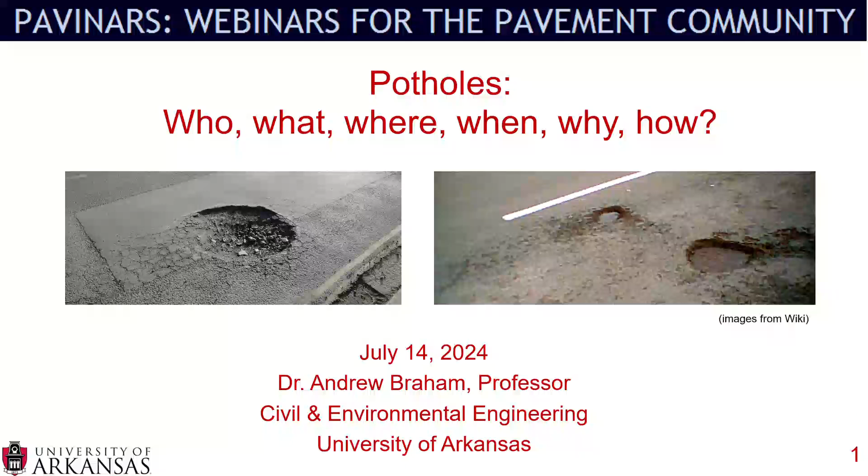My name is Andrew Braham, and today we're going to talk about potholes - the who, what, where, when, why, and most interestingly, how of potholes. We'll start with the background, covering who and what a pothole is and why we care. Then we'll talk about pothole formation, the where and when potholes form, followed by how to avoid and fix potholes. Finally, I'll show additional resources from both state and national level work.

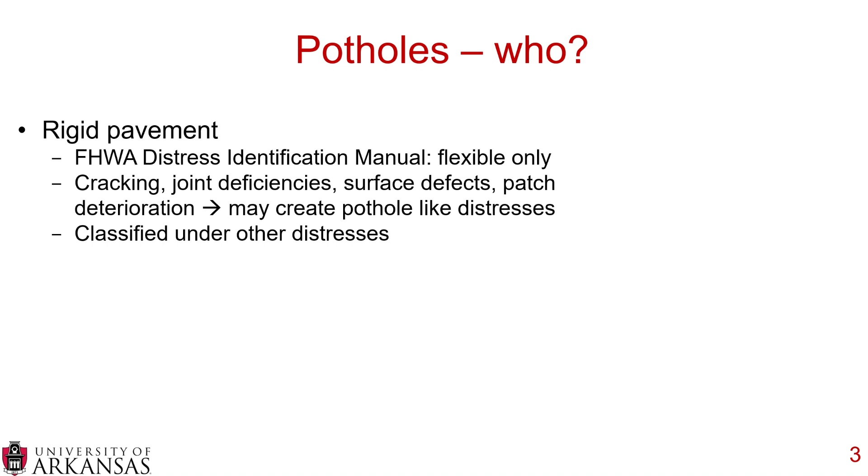So potholes, who are they? If you look at rigid pavements, the FHWA Distress Identification Manual only defines potholes as a flexible pavement distress. Now, when looking at rigid pavements, cracking, joint deficiencies, surface defects, and patch deterioration may all create pothole-like distresses, but those are discrete distresses not under the pothole umbrella. Therefore, potholes only apply to flexible pavements per the FHWA manual, defined as bowl-shaped holes of various sizes with a minimum plan dimension or diameter of just under 6 inches, so 5.9 inches.

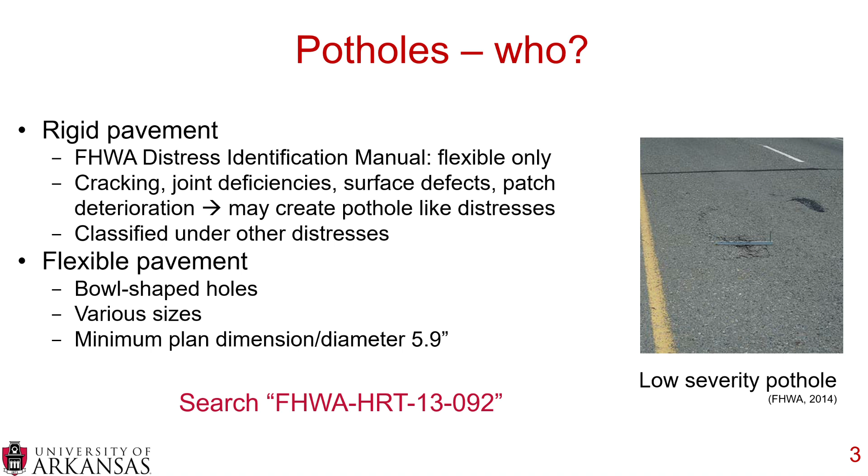As you can see on the right, we have a picture of a low-severity pothole. You can find out about all of this if you search online for FHWA-HRT-13-092, which is the FHWA Distress Identification Manual.

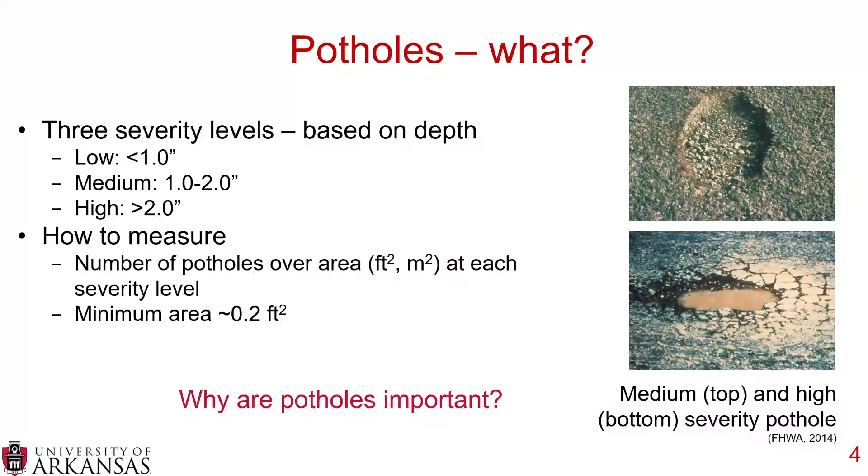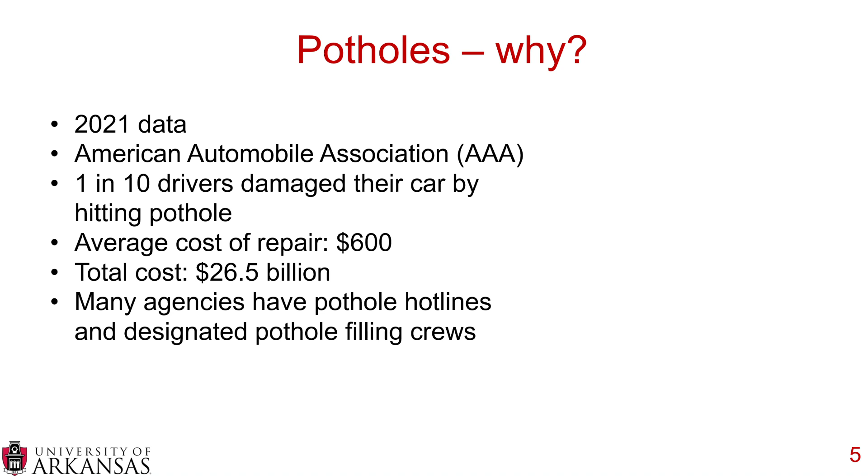Now we look at why potholes are important. If we look at the American Automobile Association, or AAA, and data they collected in 2021, approximately 1 in 10 drivers have damaged their car by hitting a pothole. So 10% of drivers in the United States have damaged their car hitting a pothole, and the average cost of repair is $600. If you look at all vehicles that hit a pothole in 2021, the estimated total cost of pothole damage just to vehicles is $26.5 billion. That's a very large number, showing why potholes are a very important issue and why many agencies have developed pothole hotlines and designated pothole filling crews.

Now, there are pros and cons to having these designated crews. Some people say it's too reactive and you should go for a more systematic approach. But at the end of the day, a lot of cities have found success with designated crews who go out and simply fill potholes every day based on where people report them in their municipality. So what can we do as engineers? We can do proper design and proper maintenance of our roads, and we'll talk about that in the 3rd section of this Pavinar.

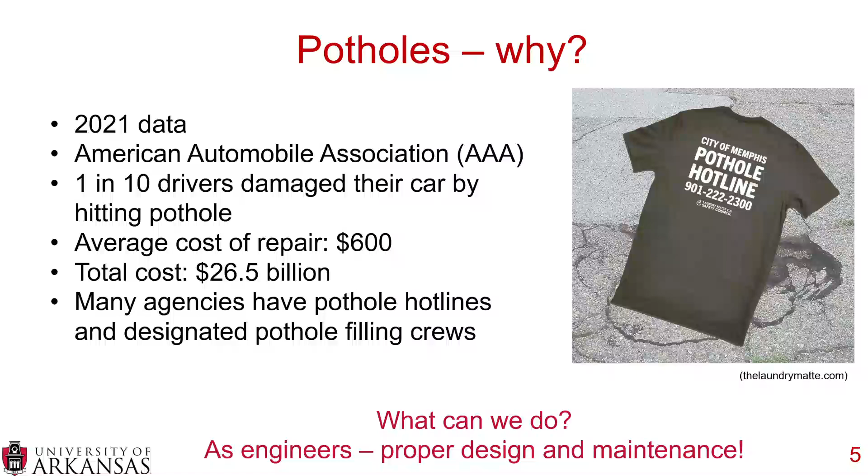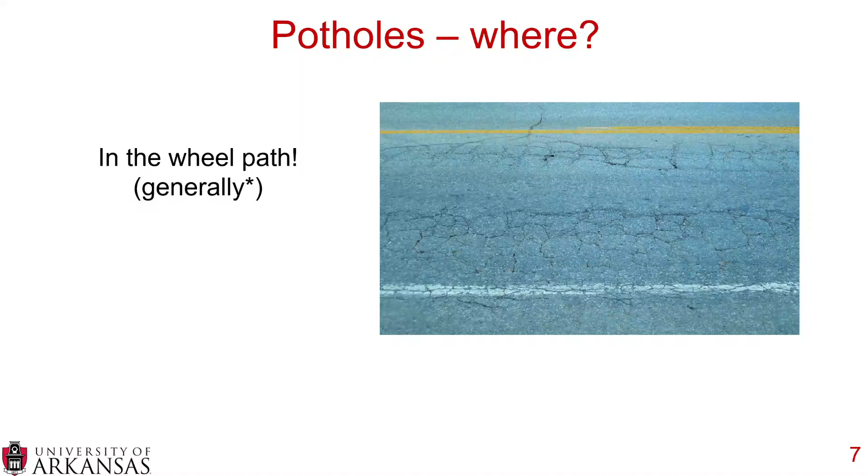Next we're going to go to pothole formation - how do potholes actually start forming? The where of potholes: generally, it's in the wheel path. You need some sort of loads in order to have a pothole start forming. You can see a pretty highly distressed pavement here, and I would assume potholes will start forming shortly on this roadway. Now, there is one big exception - poor longitudinal or transverse joints. If you have poor longitudinal or transverse joints, it may start deteriorating without even any wheel applications, and you could start getting potholes. There are other mechanisms, but in general, from a design, maintenance, and planning standpoint, we need to worry about the wheel path, and there are multiple mechanisms behind pothole formation.

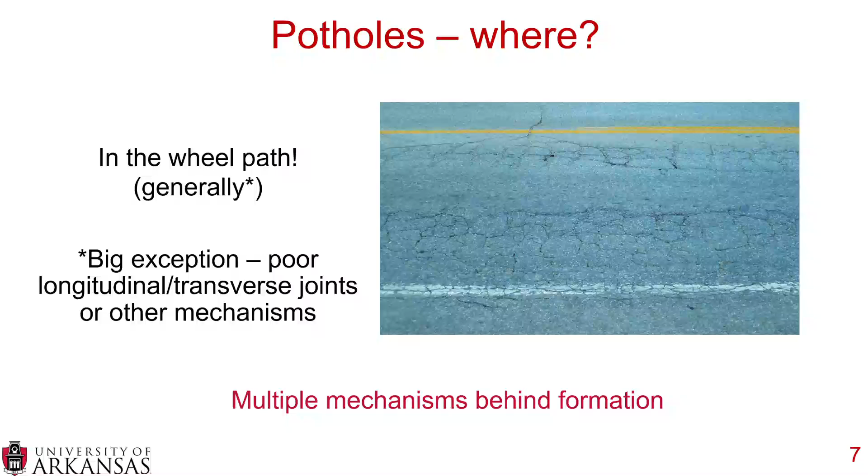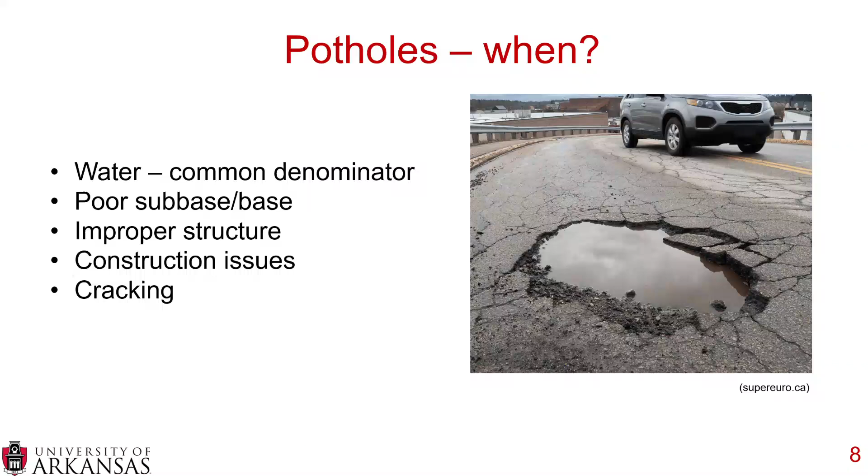So when do potholes form? Water is the common denominator. You'll notice that a lot of the pictures in this presentation - I just went online and got a whole bunch of different ones - the vast majority of them have water in them. You could also have a poor subbase or base course, improper structure and improper pavement structural design, and construction issues. That goes back to the longitudinal and transverse joints and some other issues we'll talk about. Finally, all of these types of things can lead to cracking.

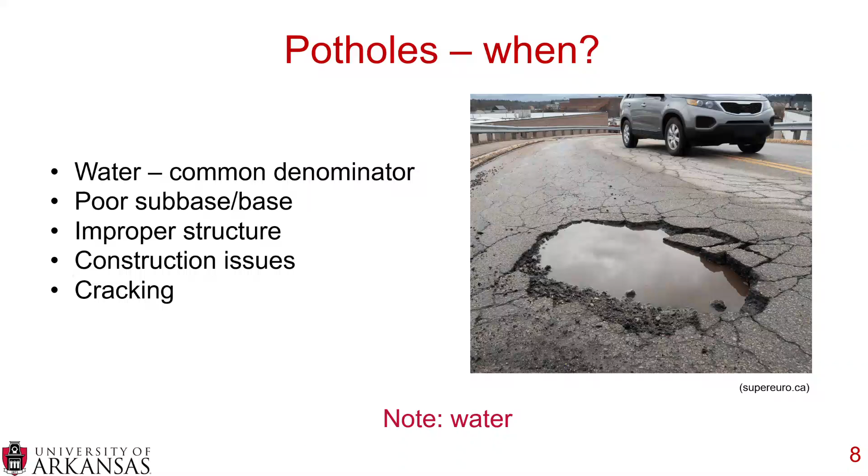And at the end of the day, you have cracking and those cracks turn into potholes. Now I do want to note that water is listed first here. Water is a common denominator, and let's keep water in the back of our mind because we're going to talk about that quite a bit more later in this Pavinar. But let's go into a little more detail about the last four.

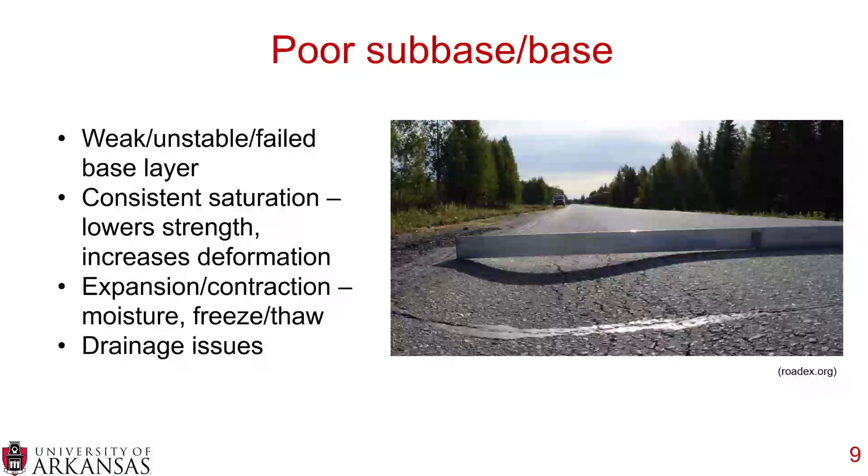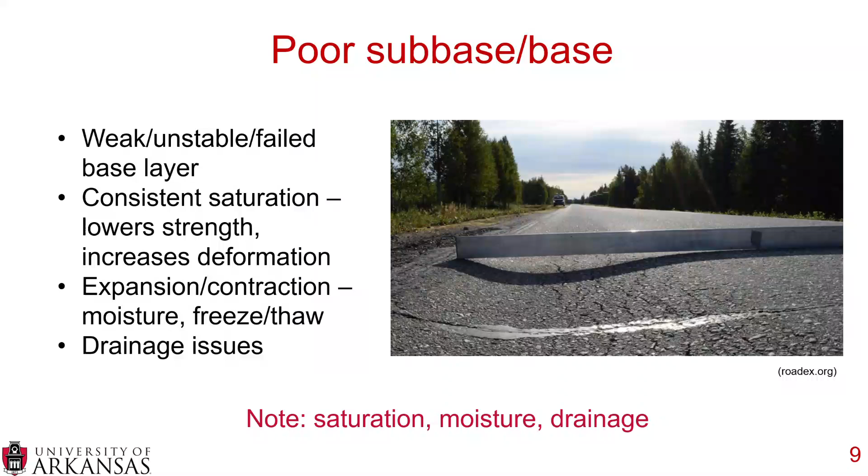So a poor subbase or base course. This can be either a weak base layer, an unstable base layer, or a failed base layer. This can be because of the materials or because of constant saturation. If you have constant saturation, you lower the strength of your base or subbase layer, and that can potentially increase deformation. You can have expansion and contraction of your weak, unstable, or failed base layer, and this comes from moisture and also moisture within freeze-thaw cycles. A lot of this stems from the fact that the subbase or base has poor drainage issues. I want you to notice that a lot of the things under the poor subbase and base come from saturation, moisture, and drainage. This all revolves around water.

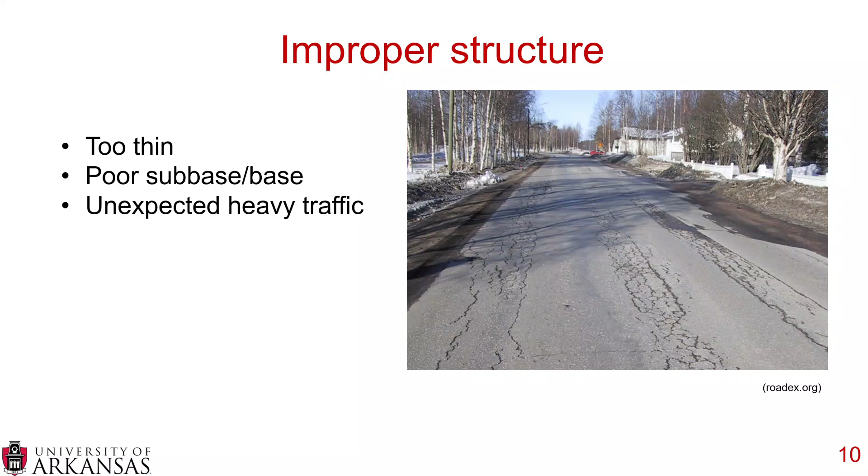You can have an improper structure, so your structure can simply be too thin. Again, you can have a poor subbase or base. If you design for a certain quality subbase or base and you're not achieving that, then your structure is compromised. You can have unexpected heavy traffic, so during pavement design, the type of traffic that goes on there is very important. Often you'll see potholes form rapidly on roads that lead to a construction site, a new neighborhood being built, or a new building being built.

That's because of those very heavy truckloads driving over a road that simply was not designed for it. You could have compromised materials, so at the plant it's either heated too much, or you could have some moisture in there which will lead to stripping, and then you can have delamination. Delamination is where you try and tack coat or glue your pavement layers together. Flexible pavements are built in layers. Those layers have to be glued together. If they are not glued together, you'll have issues. And that causes delamination, which is either an improperly placed tack coat or a failed tack coat.

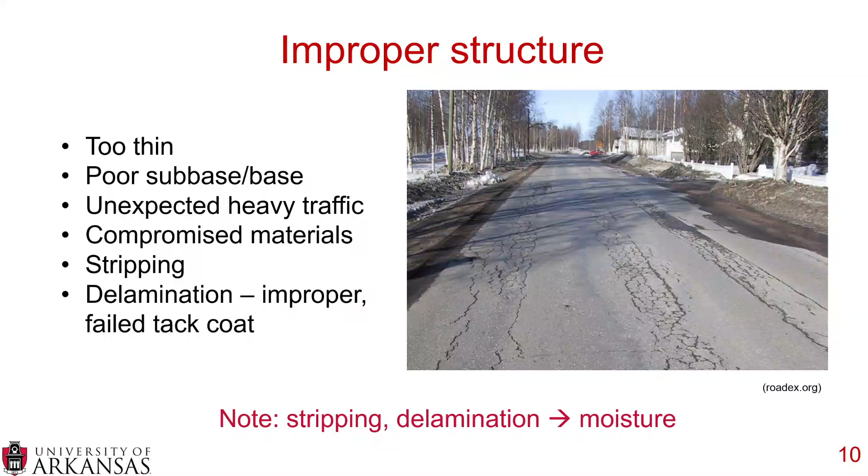Again, I just ask you to take a look at the concepts of stripping and delamination. These can both be caused by moisture, so moisture is a very important issue. Now you can have the best materials in the world, you can have the best design in the world, but if you have poor construction, you're going to have issues. There's a couple things you want to look out for. One is asphalt mixture segregation, and this can be either physical or thermal.

Poor longitudinal joints can cause potholes. If you want to see some great potholes, come on over to the city of Fayetteville, Arkansas, and drive down Maple Street. There's a right-hand turn lane that turns right into Arkansas Avenue, and that is just a haven for potholes. They fix it all the time, put overlays on, fill the potholes, and those potholes just keep coming back. So got a great example here in Fayetteville, Arkansas.

Then also, if you have deleterious materials in your mix, that can cause weak spots. Those weak spots fail and potholes can start forming there. So obviously, you always need to be very careful with your construction and have proper construction practices.

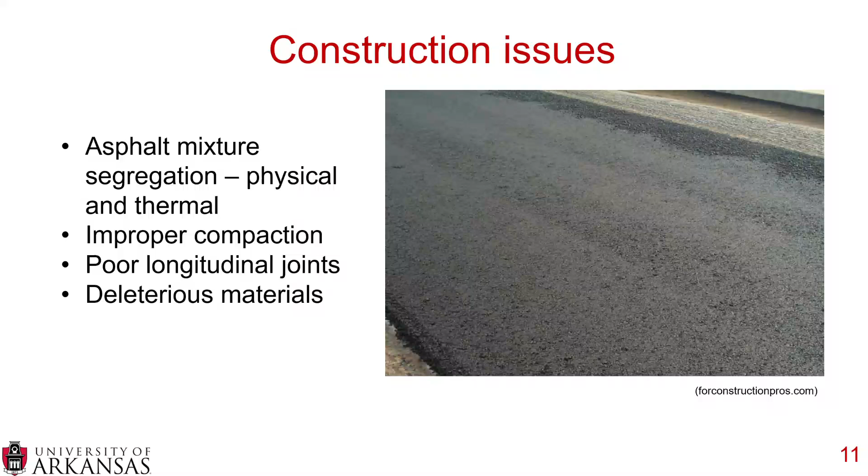Now, all these things at the end of the day usually lead to some sort of cracking, and you need cracking in order to get potholes. So the accelerators of cracking are both age and oxidation. It can also be all of the issues that we talked about before, the poor subbase, the moisture, the construction, all those types of things.

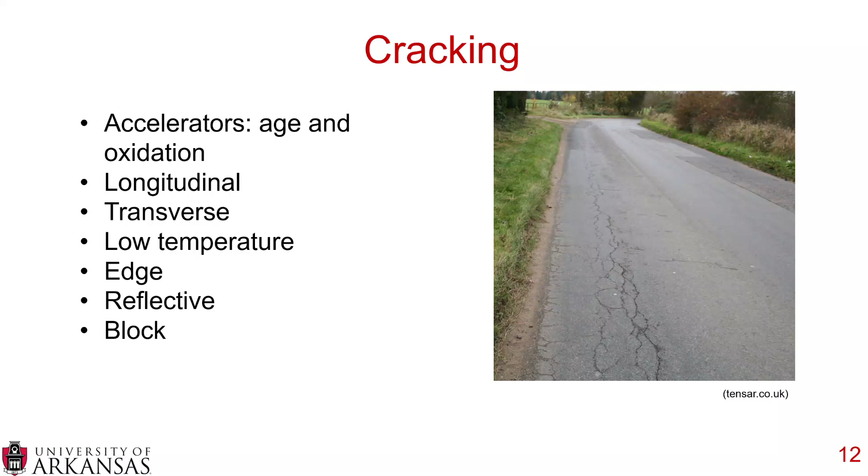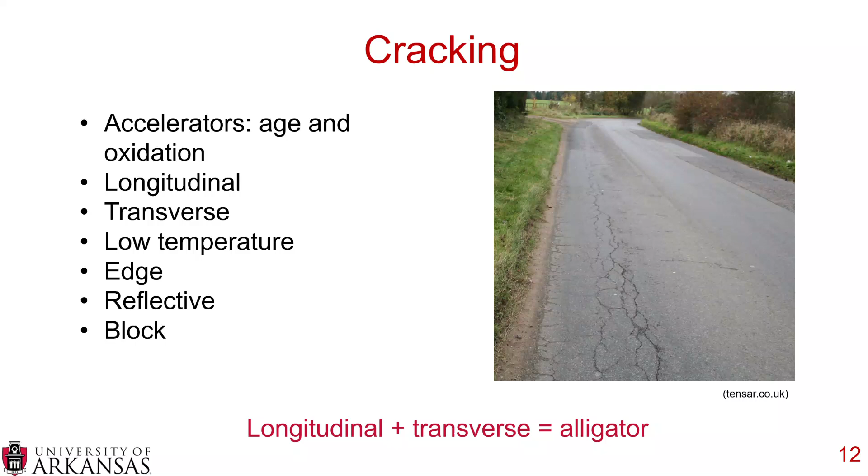And you can have longitudinal cracking, transverse cracking, low temperature cracking which is also called thermal cracking, edge cracking, reflective cracking, and block cracking. You can see here in this picture some longitudinal cracking, some transverse cracking, and that's called alligator cracking. What happens is, as you've seen in previous pictures, there are small little sections of asphalt just sitting there, the little islands. Once those start popping out, that's where potholes start forming. So if you start seeing longitudinal and transverse cracking joining together like this, and you start seeing alligator cracking, there's a very high probability you'll start getting potholes, because those little chunks of asphalt will just start popping out, and that's where your pothole will form.

So we talked a little bit about formation, but what can we do to ideally avoid, or if necessary, fix potholes?

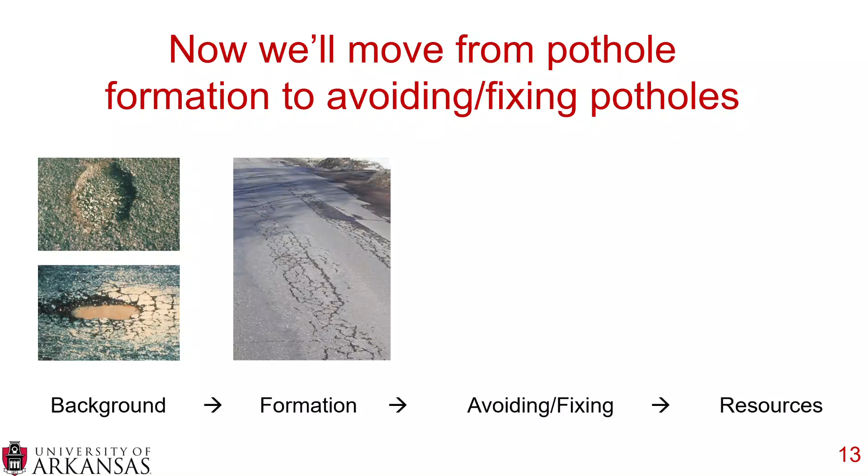The biggest thing we can do to avoid potholes is keep the water out, and there are two things that are very easy to do. First, keep the surface of your pavement sealed by applying some sort of surface treatment—it can be a chip seal, a slurry seal, or microsurfacing. Those treatments allow water to hit the pavement surface and run off, rather than going into the pavement structure.

It's also very important to maintain drainage. This can be drainage installed with the construction, or drainage in the ditches next to the pavement. But if water does get into the pavement structure, you want it to be able to quickly flow out and away through whatever drainage mechanisms you have.

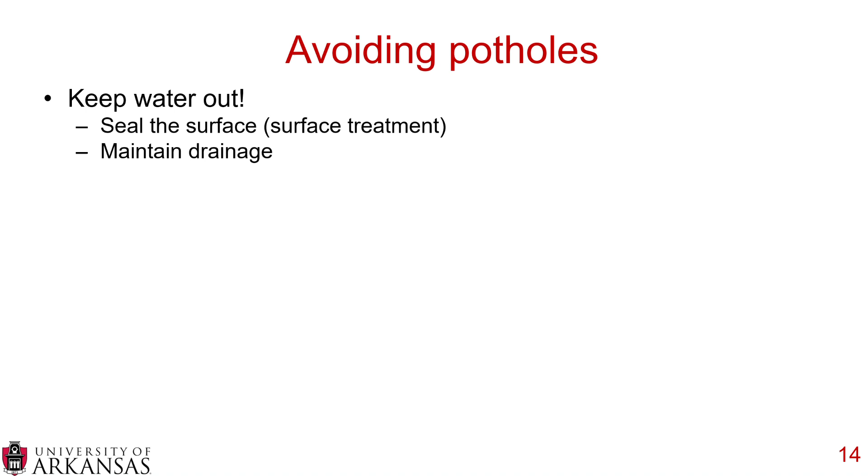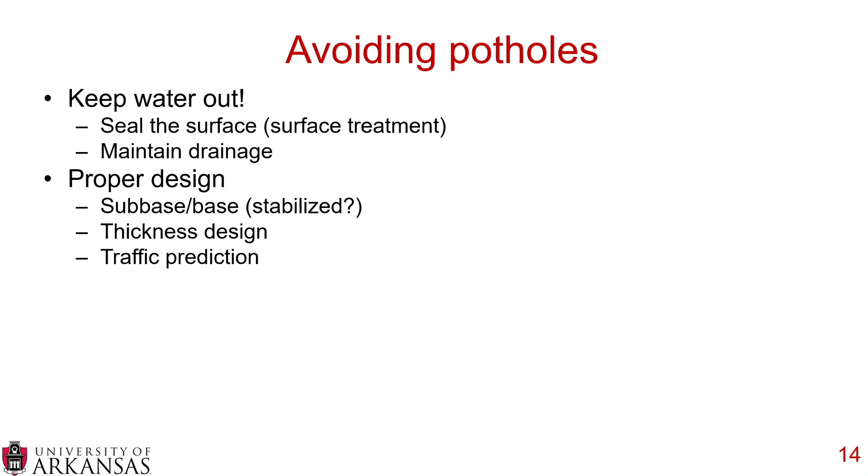You want to have a proper structural design. This includes a functioning, high quality subbase or base. You may need to stabilize your subbase or base with either asphalt emulsion, asphalt foam, or Portland cement. You want to make sure you have a thick enough pavement structure for the loads being applied, and that you're predicting the traffic properly.

You also want to have proper construction, so you want to clean any existing pavement and make sure you have a nice, even, clean surface that you're placing your new asphalt mixture on.

I would always recommend having an MTV, a material transfer vehicle. This avoids both thermal and physical segregation, because the asphalt mixture goes from the truck into this machine, which has basically a giant pug mill that remixes the mix immediately after coming out of the truck and places it in the paver. This means you have a nice, homogeneous mix, free of both physical and thermal segregation, going directly into your paver. These are extremely beneficial pieces of equipment.

As you build your flexible pavement structure up between those asphalt layers, you want to make sure you put a good tack coat—I have an entire Pavinar on tack coat, so if you're interested in learning more, I encourage you to check it out. Then during compaction, you want good rolling patterns, and you want to make sure you're getting good joint compaction, both longitudinally and on your transverse joints.

At the end of the day, doing all these things should minimize cracking. If you minimize cracking and keep the water out, you should minimize potholes.

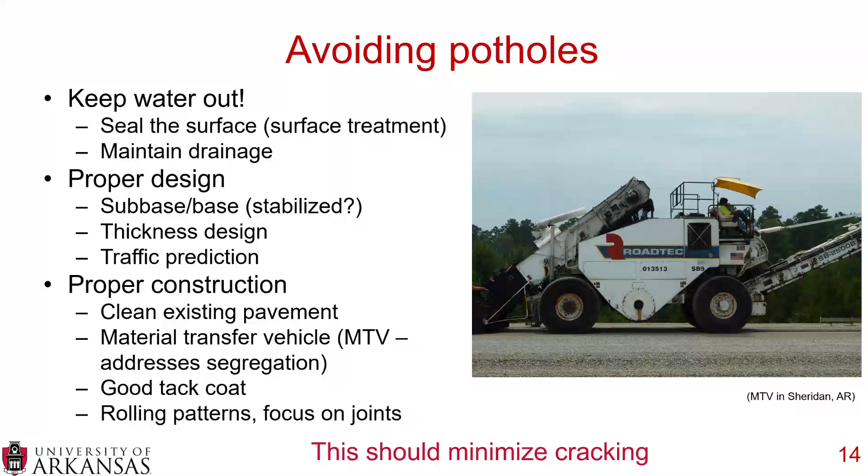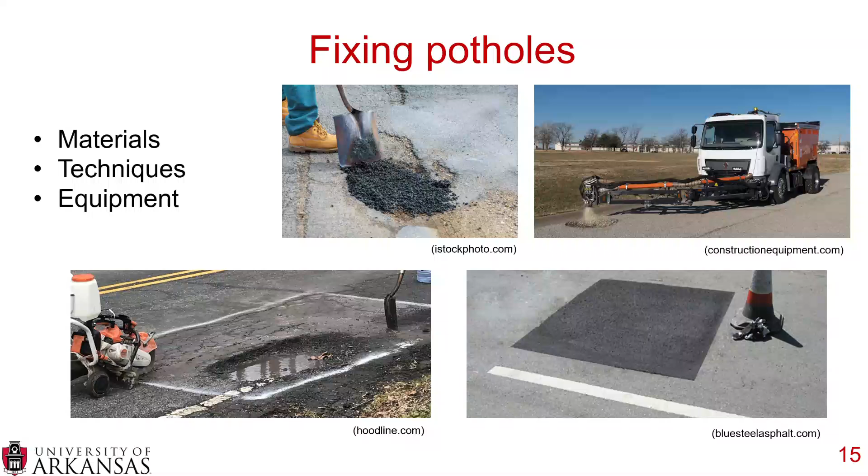When we're talking about materials for fixing potholes, let's talk first about hot mix asphalt, which is considered the best type of material. Hot mix asphalt generally follows your surface or binder course specifications—so in your area, you place surface courses of asphalt mix down, you have some sort of specification for those surface courses, and you usually use that same specification for the hot mix asphalt placed into potholes.

Some potential issues with hot mix asphalt: you can get thermal segregation, especially if you just have a truck of hot mix driving down a road, putting little shovelfuls into each pothole. It's also very difficult to get good density once the mix is in the pothole—asphalt mixtures need proper density, and putting material into a relatively confined, isolated area makes it very hard to get good compaction. Permeability is also an issue. It's hard to get that good density, hard to get it sealed, and if water gets into the system, chances are another pothole will form in probably about the same place.

Now, there is a lot of cold mix asphalt used as well because it takes care of the thermal segregation. It allows for a truck to go out in the morning with a bunch of mix and then come back in the evening empty, and you're not going to have that thermal segregation. Your mix isn't going to cool as the day goes on.

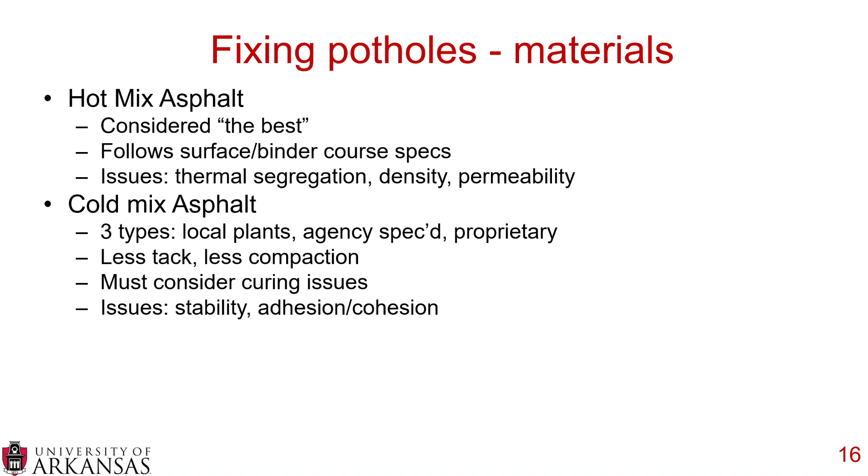Now, I love cold mix asphalt, so it kind of hurts me to say that, but we do need to recognize that the adhesion and cohesion characteristics of cold mix asphalt materials are different and generally not as well as hot mix asphalt.

Three other kind of categories of material for spray injection. You have emulsion and crushed aggregate. It almost forms like a slurry type material, and the equipment is key. We'll talk about that more in upcoming slides.

You can have resin-based pothole patching material. It has a very high cost, but it's actually very good for low temperatures. And then also you can place various additives into your material. For example, anti-stripping agent is recommended. That could be anything from 1% lime, it could be silicon-based, it could be a chemical anti-stripping agent. But there's also various other additives, especially if it's a proprietary material, that enhance performance, or at least are supposed to enhance performance.

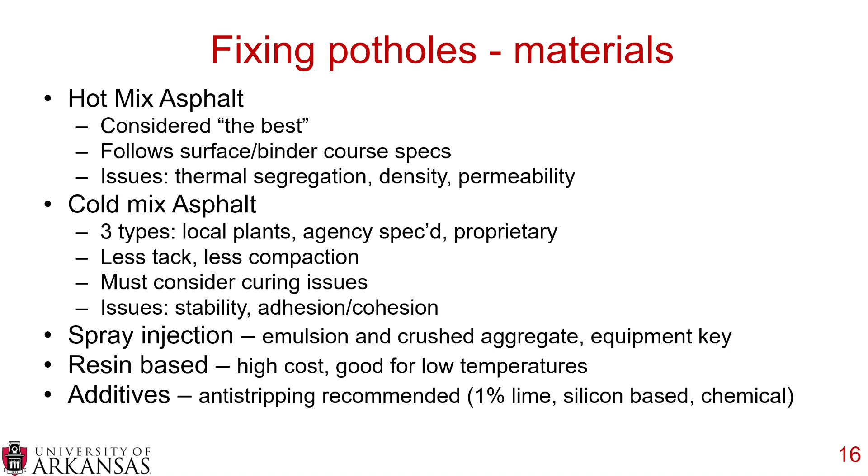So techniques, you've probably seen this a lot. Two guys in a truck, the truck's just going down the road slowly, they've got a couple shovels, they're tossing the mix into the hole, and they just go down the road. The truck may back up into the other truck, or the truck with the material may back up, kind of do a little bit of compaction. But this is called throw and go or throw and roll, and it's very, very common. And you place either hot or cold mix asphalt into the pothole, the truck compacts it to a slight crown, and then you're open to traffic, you're good to go.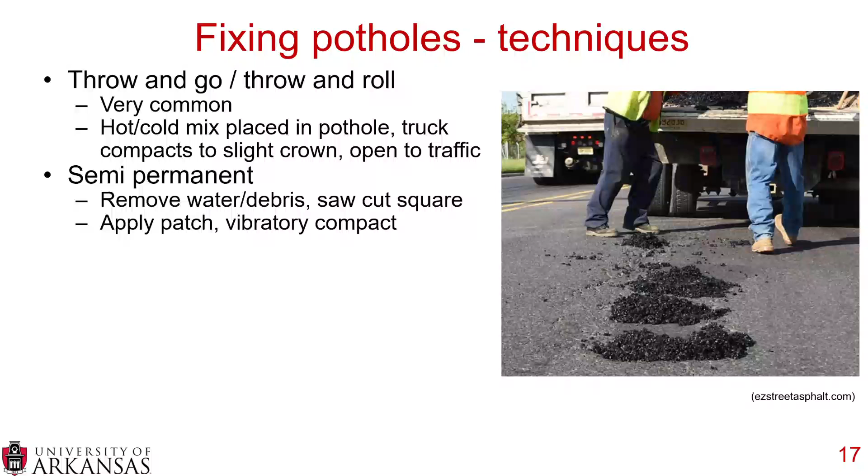Semi-permanent, we're kind of stepping it up here in quality of patching. That's where you remove any water or debris, you saw cut squares, you apply your patch, and you use a little vibratory compactor in order to get a little bit of density in that mix.

Permanent patching, this is the gold standard or the Rolls Royce. It's similar to semi, where you cut outside the worn area. So you actually cut into good pavement, which means you're getting rid of all your bad pavement. You remove all the material down until you get to a stable base. So these can be much wider, these patches, and much deeper than a semi-permanent patch. You then put tack coat on the bottom and on the sides, so you make a nice, good little bathtub full of tack coat. And then you place the material in and you compact it. And this really is the gold standard. And if you do a permanent patch well, that will last as long as the rest of your road. Because you got your density, it's glued to all the other surfaces, water's not getting in, so you're good to go.

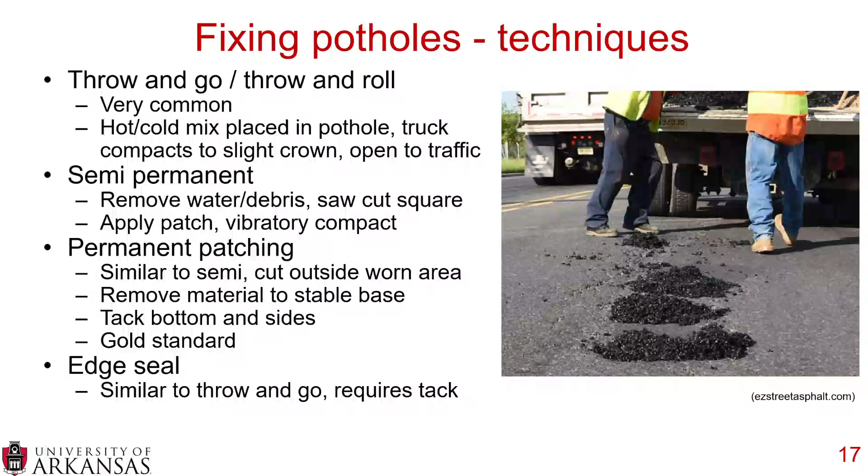Now, edge seal, this is very similar to throw and go, but it does require tack. So I probably should have put this up between the semi-permanent and the throw and go. But you just put a little tack coat in there, and then you throw material in. It's kind of a step up from throw and go, but it's not quite as good as semi-permanent.

Now, I do want to spend a little bit of time on spray injection because you do need very unique equipment and you need unique material. So you have a crushed single-size aggregate and you have emulsion. And like I said, this kind of creates a slurry. And what happens is you have a very specific piece of machinery, which we'll talk about in a minute, but it gives you a wide range of performance. So it's nearly equivalent to permanent repair if everything is done right. There's been a lot of research done on spray injection, but if you do everything right, it's nearly equivalent to permanent repair.

Other studies have found that you can have lack of density, you can have issues with the equipment clogging, and you can have spraying issues.

Now, of course, specialized equipment is required. Some of these patching pieces of equipment have very large blowers on them, which can remove water and dirt. Then you can spray a tack coat with the piece of equipment. Then you spray the pothole mix. Then you spray cover aggregate. So you kind of have like a buffet of materials on there, and you pick and choose what you want to do. You can clean it out, put just tack down, put the pothole mix, and then put a little bit of cover aggregate on there.

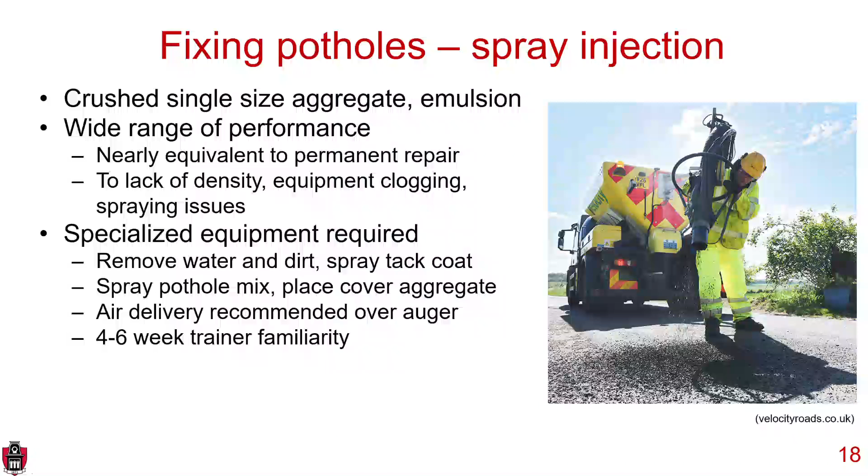It's also important to note that there is training required, and it takes about 4 to 6 weeks. These are extremely powerful, extremely functional pieces of equipment, but that requires a very good insight on how to use it.

Now I do want to talk about a little bit of efficiency, how many minutes it takes to do a pothole, and you can see immediately why throw and go is the most popular. It's the fastest, and it's by far the cheapest. You don't need a piece of specialized equipment, you need a truck and a couple shovels.

Spray is about the same speed as a throw and go, but you require a very specific piece of equipment. A semi-permanent takes a little bit more people, takes a little bit more time. Of course, that's going to increase the costs.

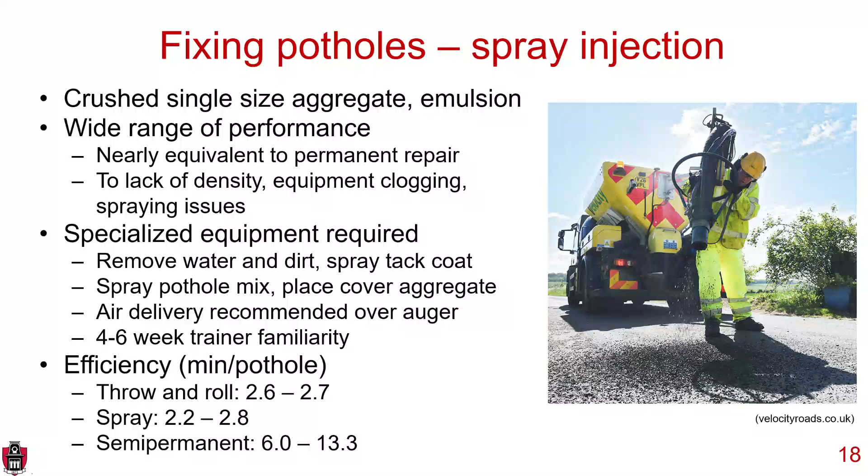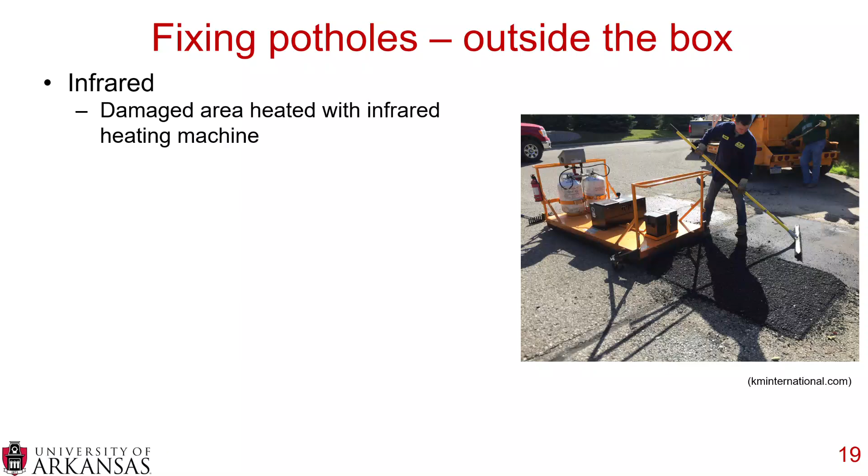Now, there are some more innovative solutions out there. For example, we do have some infrared technologies, and this is where you heat the damaged areas with an infrared heating machine. You remove all that heated material, mix it with new asphalt binder and a rejuvenator, and return the material to the hole and compact it. So this is a very robust, very comprehensive system. It also takes a lot of time, about 20 minutes per pothole.

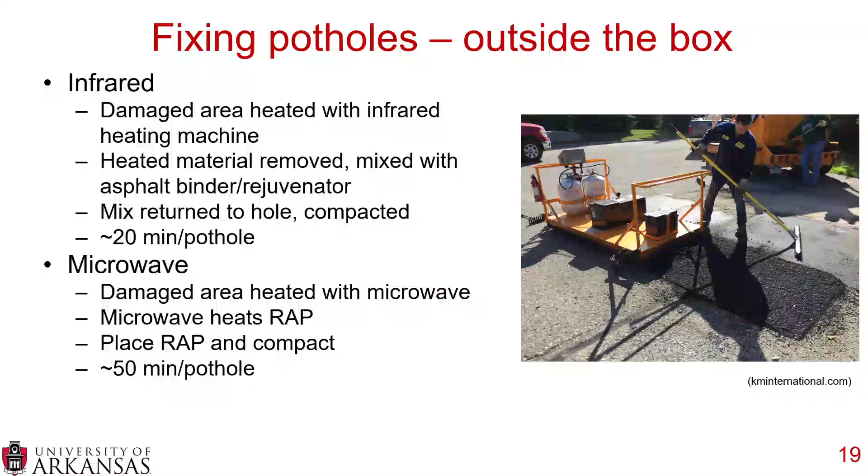You can do something similar with microwave. This is where the damaged area is heated with a microwave, and you also heat RAP with the microwave that you're going to place in. You put the RAP in the hole, you compact it. Again, there are some benefits to this - you're getting things to higher temperatures that tend to lead to better compaction, but it does take a long time. They estimate about 50 minutes a pothole.

So we talked about throw and go, semi-permanent, permanent, spray, infrared, microwave. What is best? Of course, it depends - on the weather, the time of season, the lane location, the size of the pothole, the money you have available, the equipment you have available, the personnel you have available. The list goes on and on. I think this is one of the reasons why pothole repair continues to be such a challenge. You want to do it quick, you want to do it well, and those two are very, very hard to balance.

So it's kind of interesting, I think there's been a little renaissance here in pothole research, as you'll see. It's interesting to see what's happening and to follow the progress that we're making.

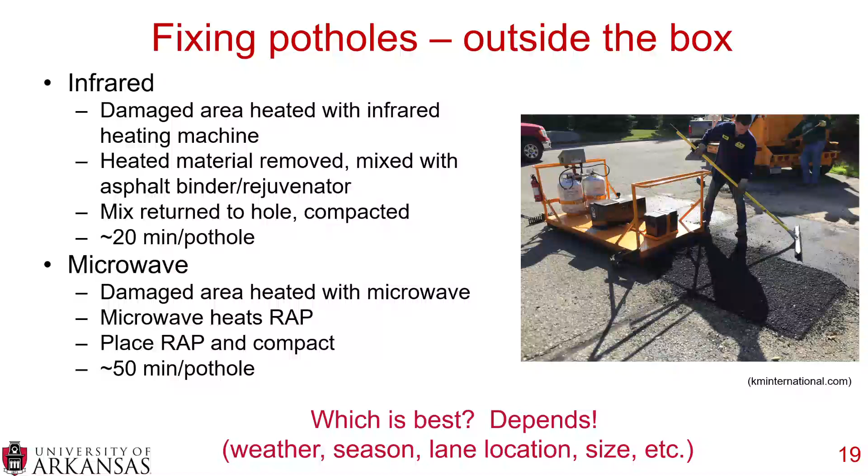Now, for fixing potholes, what kind of equipment and workers do you need? In general, for throw and go, for the basic ones, you need 2 workers. You need a truck, some hand tools, a shovel, a tamper, maybe a broom and a brush if you've got an elite equipment list to get excess material out.

If you're doing more advanced work, the semi-permanent and the permanent, you'll also need a saw, a jackhammer, an air compressor, and some sort of compaction device. This increases the number of workers you need, especially if you want to keep moving down the road. Maybe you can have one crew sawing, jackhammering, and cleaning out, and then the next crew place and mix. But it's going to take either a little longer or it's going to take some more workers.

If you have hot material on site, you're going to need some sort of hot box. So if you're using hot mix asphalt, this keeps the material hot. And there's two different types - you can either have a holding tank, which is basically just like an insulated tank.

There's no heating source, but it does help keep material warm. Or you can have what's called a reclaimer, which is thermostatically controlled. This is basically a small oven, and it keeps your material warm.

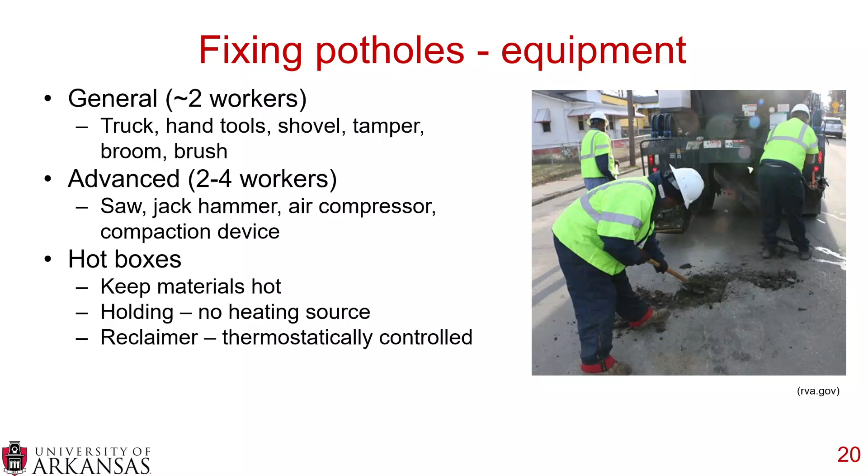Just to reiterate, for spray injection it takes about 2 workers. That's because there's one driver and one person with the boom in the back. So you need 2 workers and a specialized truck. That's the different equipment you need.

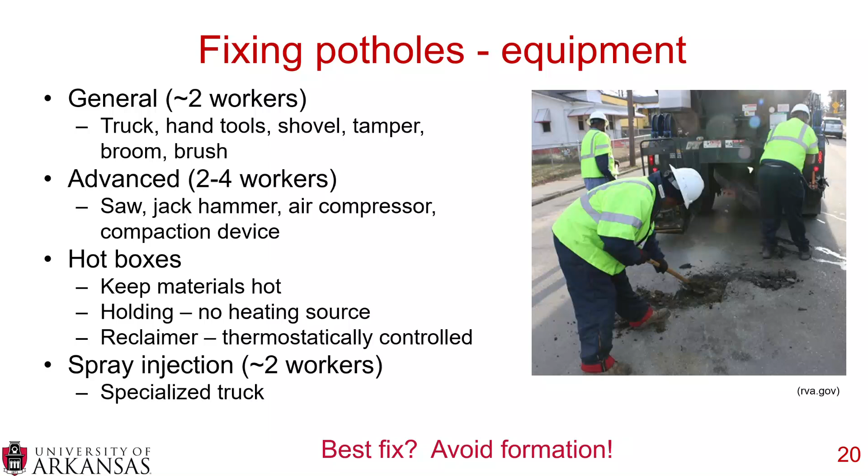I want to finish avoiding and fixing potholes by simply saying, what's the best way to fix it? That's to avoid formation. Keep that water out, and good construction practices will go so far in keeping the number of potholes down. I know it's easy for me to say this as an academic, but if you're spending a lot of money on pothole repair, I do ask you to consider: are there small things we can start on at the front end that will help avoid the formation of these potholes?

We're going to go from avoiding and fixing potholes to some resources. We've got some work from the University of Illinois. If you search FHWA-ICT-21-003, this was done by Hajj and Lu. They talked about materials, techniques, equipment. They had some very nice sections on field practices, and they also had some local meetings and took good notes during that. This is a very nice, free to download resource, put out in 2021.

A little bit older, from 2018, from the University of Minnesota, Ghosh et al. If you search LRRB report 2018-14 -- when I searched that, it wasn't the first thing that popped up, the summary was -- but if you look a little bit, you can find the full report. I think it's about 120 pages. It's got a great lit review, and some interesting pothole stress analysis. So they did a little bit of analysis on the stresses and strains that are applied when potholes are formed and filled. They talked about some new materials that you may need to place in there.

Something I really liked about this report is the section on proactive preservation activities. For those of you who've watched other Pavinars of mine, you know how much I love pavement preservation, so I'm really happy that the University of Minnesota put something in their report.

And then the third one is from New Jersey, it's Wang and Chen. If you search FHWA NJ-2024-001, again they have a great lit review. They talk a lot about field performance. Something I liked about this study is they have a very nice life cycle cost analysis.

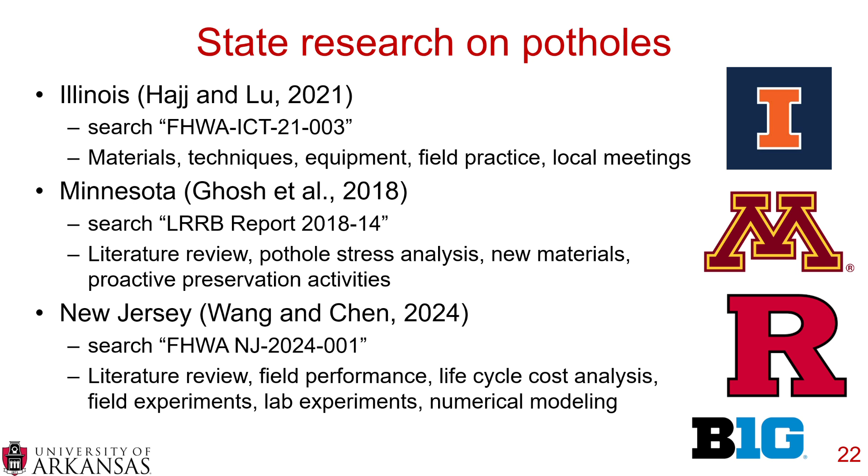So if you're interested in, well, throw and grow is cheaper but it's not going to last as long -- what would it cost to go up to a semi-permanent patch, and how much longer would that last? How much money would I save in the future? They go into that in their life cycle cost analysis. They also talk about some field and lab experiments they ran, which was very interesting, and they also had some numerical modeling.

But there is more research in addition to the national level. Now, I'm originally from Wisconsin, so I have to point out that all 3 of these universities are in the Big Ten. Just saying.

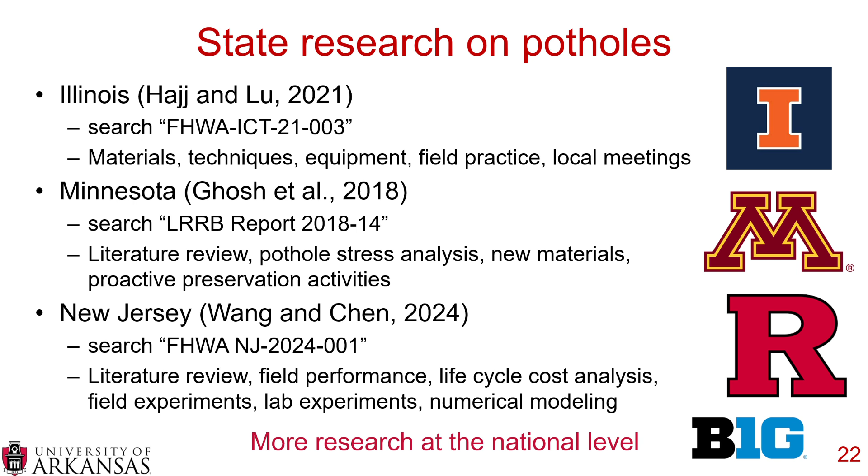But looking at a national level, if you search NCHRP Synthesis 463, this is pavement patching practices. This was put out by Becky McDaniel and her group in 2014. She was a phenomenal researcher. Anytime you see McDaniel on a report, you know it's going to be high quality, no question.

They start with their literature review. They had a very nice survey response. They do a very good job of summarizing state practices -- what are other people doing out there? And they also had some case examples, which makes it a great document. It's getting a little old, but again, great document, and those topics never die. They're all good, high quality.

I also want you to keep an eye out for NCHRP Synthesis 20-05, topic 56-16. Now, if that doesn't put you to sleep, I don't know what will. But if you search data collection and management to expedite pothole repairs -- currently I'm recording this in 2024, it's due to be completed in late 2025, but if you're watching this in 2026, go ahead and search for it because I'm sure it'll have a lot of interesting information. Just like anything Becky McDaniel wrote, anything that comes out of NCHRP, you're pretty much assured a solid, comprehensive document.

So, summary of potholes: we went over the background, how they form, how to avoid potholes -- I'm a big fan of that -- and how to fix potholes, and then some additional resources if you're interested. Thank you very much for joining me, and I hope you have a wonderful day.